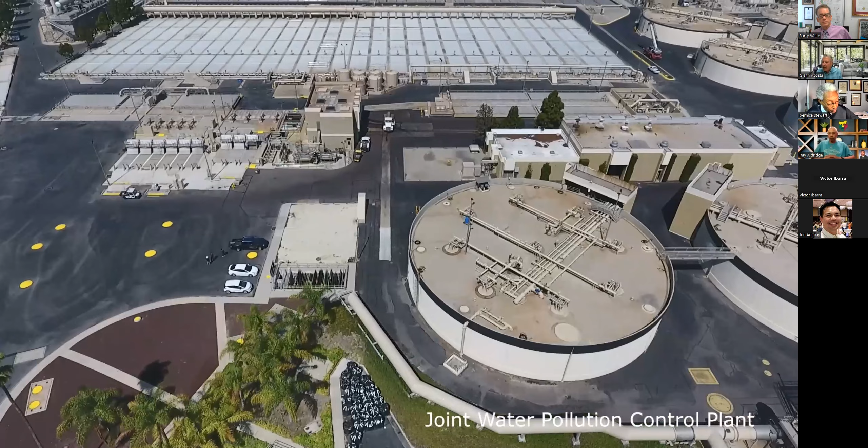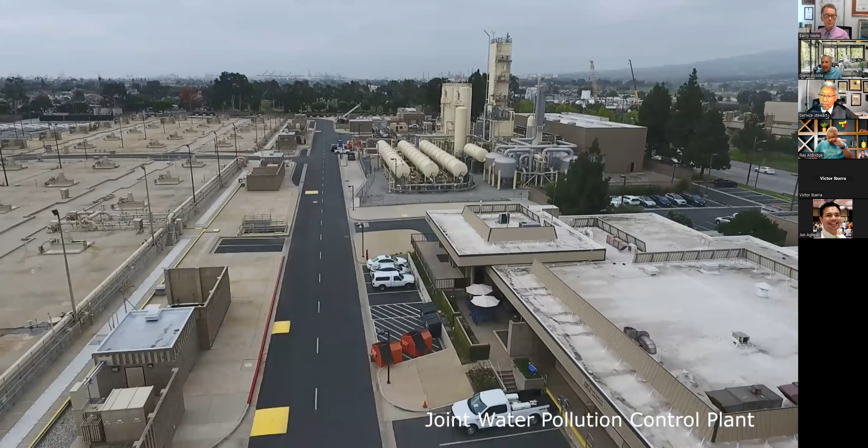As many of you know, we manage the sewage, or what we call wastewater, for over half the population in Los Angeles County. Our plant in Carson is the hub of the sewer system that serves the southern half of the county. Here you see a video clip of it. Whether you're living in Manhattan Beach, Carson, Monrovia, or Pasadena, you depend on this plant operating 24/7.

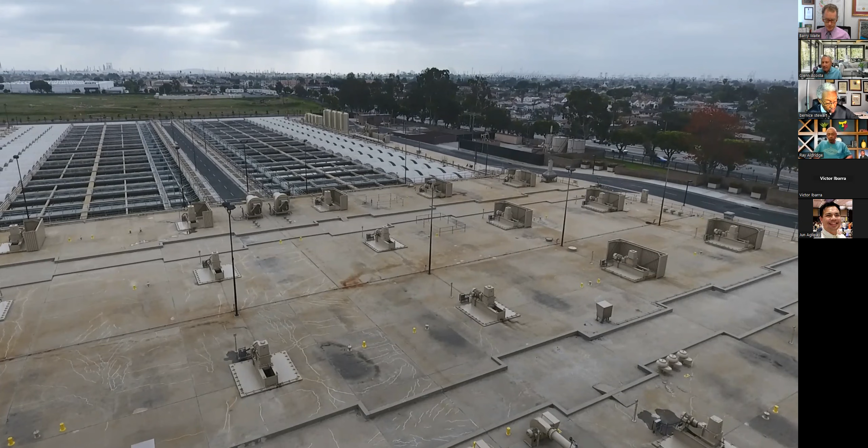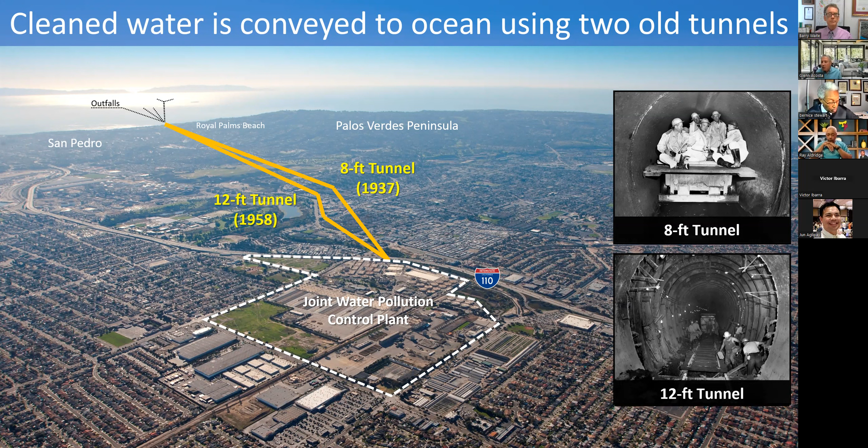So what happens is sewage comes into the plant, and in about half a day, that gets turned into clean water, and that clean water goes out to the ocean through 2 tunnels. Those tunnels were built 60 and 80 years ago. And so the Clearwater project is about addressing this aging infrastructure by building a brand new tunnel.

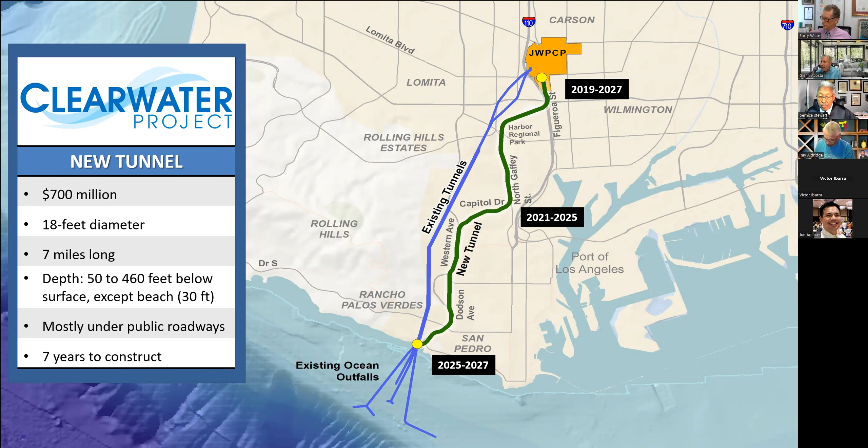So it's a 7-year project. We started in 2019, and the project won't be finished until 2027. The tunnel is about 7 miles long and 18 feet in diameter on the inside.

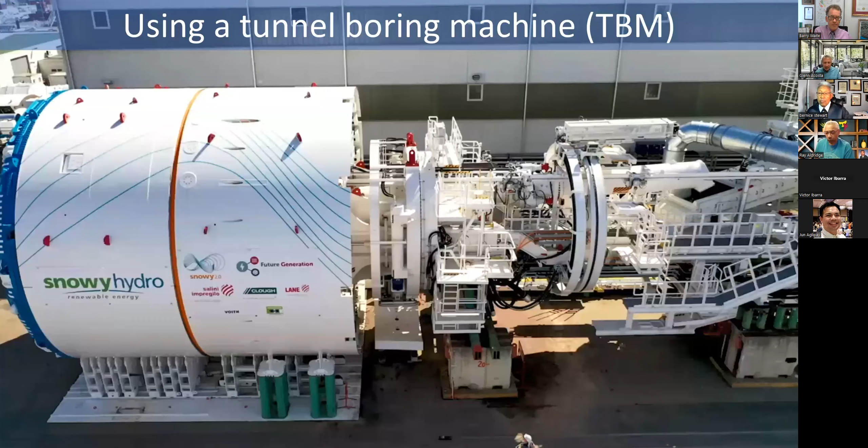So the front is what cuts away the rock and soil. The second section behind that is what puts up the walls for the tunnel. And then this long piece called a trailing gear is like a mini city that supports the front operation.

So here's how it works. The TBM, as we call it, cuts away the rock and soil for about 5 feet. It stops and starts putting up the walls of the tunnel. Once it builds a ring, it pushes off that ring and goes another 5 feet, and then starts putting up more walls. So essentially, it builds a tunnel as it digs.

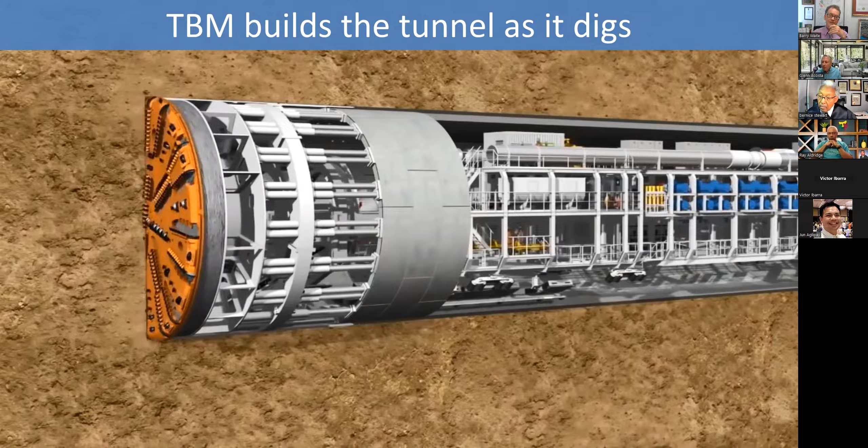So we needed to put this TBM into the ground so it can start tunneling. Right next to the 110 freeway on our property there, that's where we built a shaft so we can lower the TBM into the ground and start tunneling.

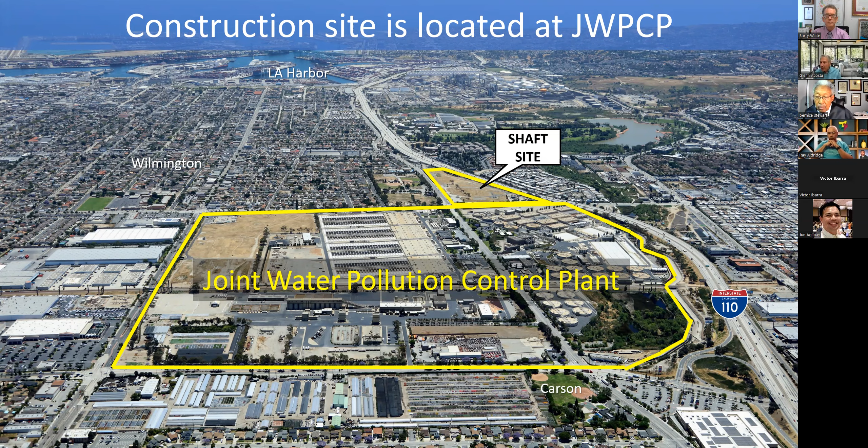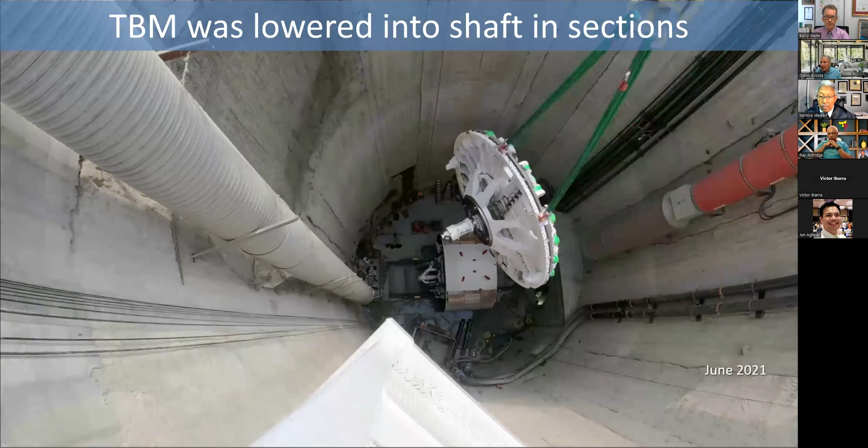So 2 summers ago, we took the TBM in sections and lowered it down the shaft. It's about 100 feet below the surface. At the bottom, the workers began to assemble the front piece, and then that's where it started pushing away and starting a 7-mile journey.

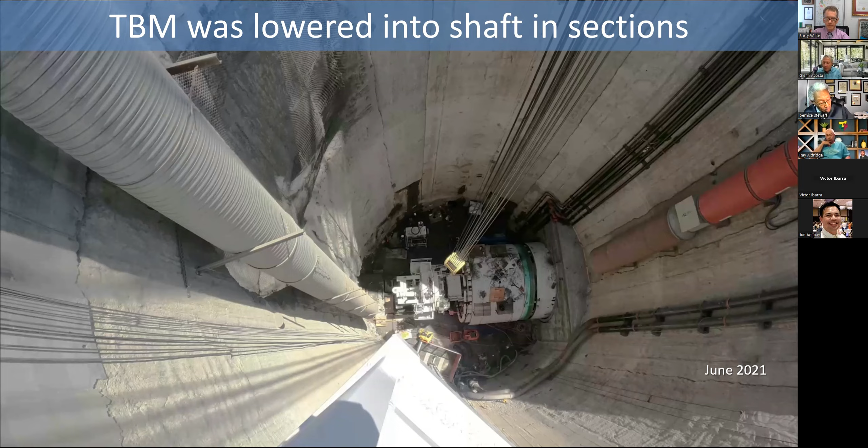So if you look at the shaft today, this is what it looks like. And here's kind of a view of the front part of the tunnel next to the shaft.

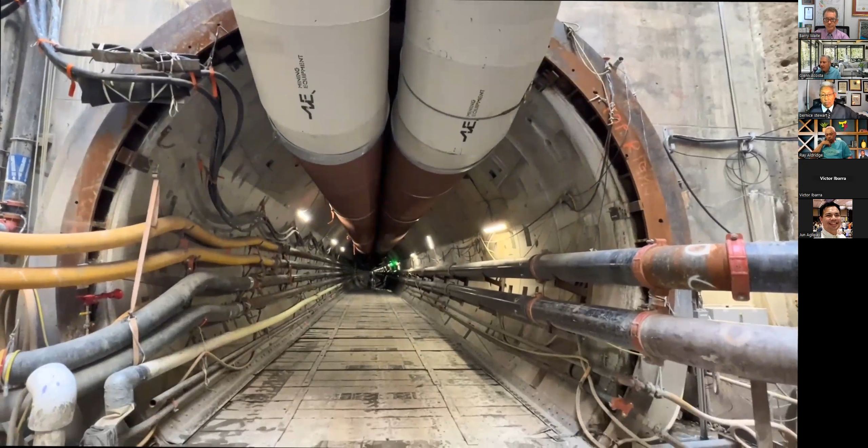So if you were to look at the alignment of the tunnel, it looks something like this. This yellow line is where the machine is going to go from Carson to the beach, Royal Palms Beach, 7 miles long. We started tunneling in November of 2021.

This past January, we hit the 2-mile mark. Right now, it's on Gaffey Street, right where the Home Depot is. So if you look at the area, that's where it's at. We hope to be at the target, the 3-mile mark, this summer in late July.

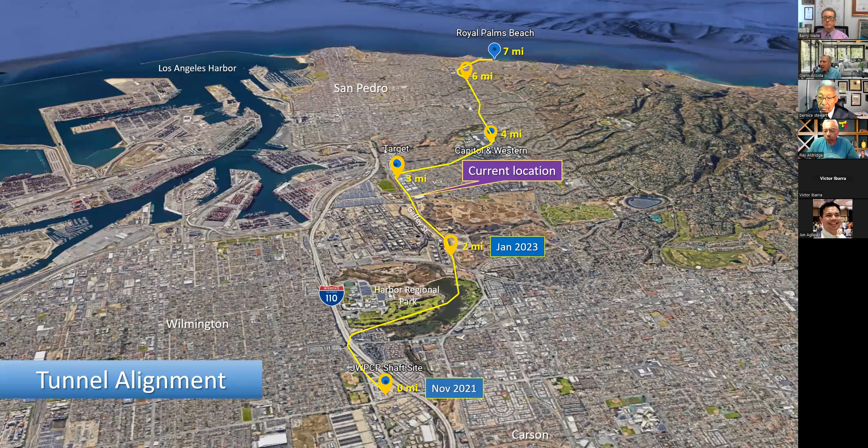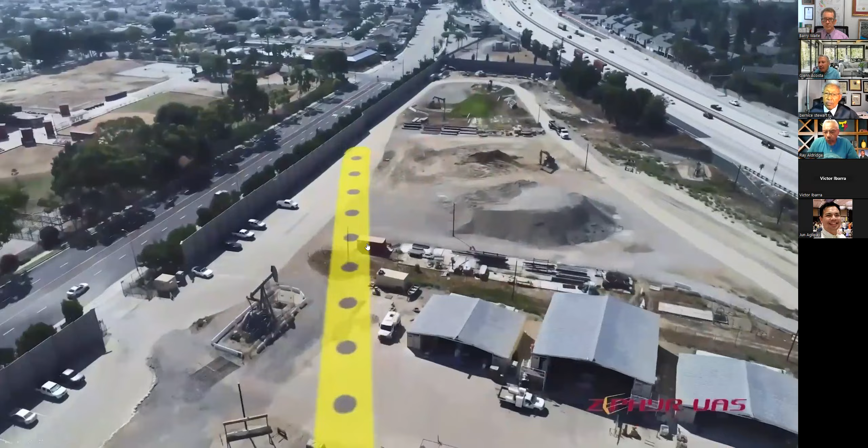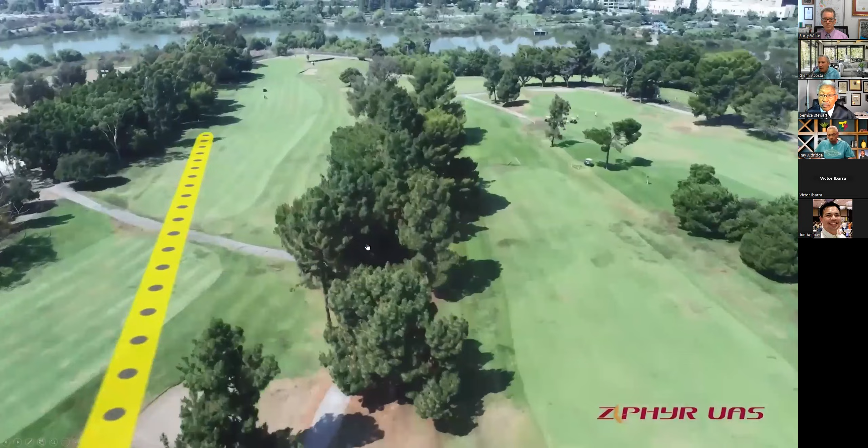So here's the path that the machine has taken. It left the property that we own down Figueroa, took a right turn underneath the 110 freeway, and then started going underneath Harbor Regional Park. On Machado Lake, it started making a turn towards Gaffey. It went up Gaffey and has gone past the refinery already.

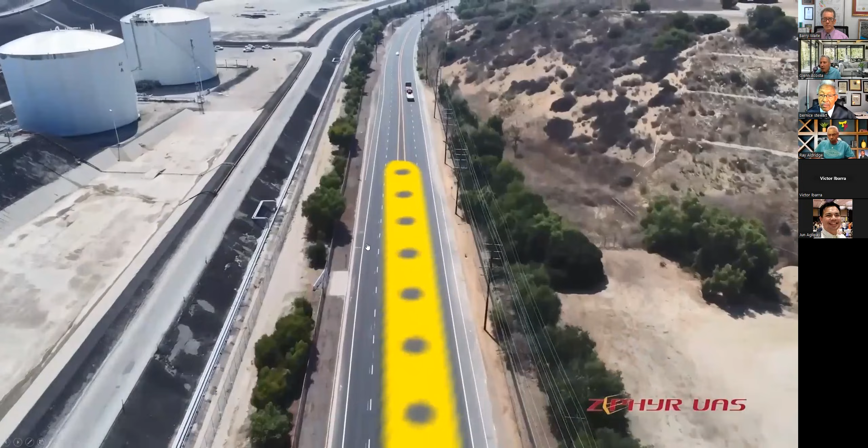And as I mentioned, it's basically where the Home Depot is today. So sometime in the summer, it'll start making the turn underneath the Target parking lot, and going up Capitol.

So how many feet does it go a day? It goes about 50 to 70 feet a day.

And here on the left, you see the first few feet of tunnel that was built right where the shaft is. And on the right is the first mile of tunnel.

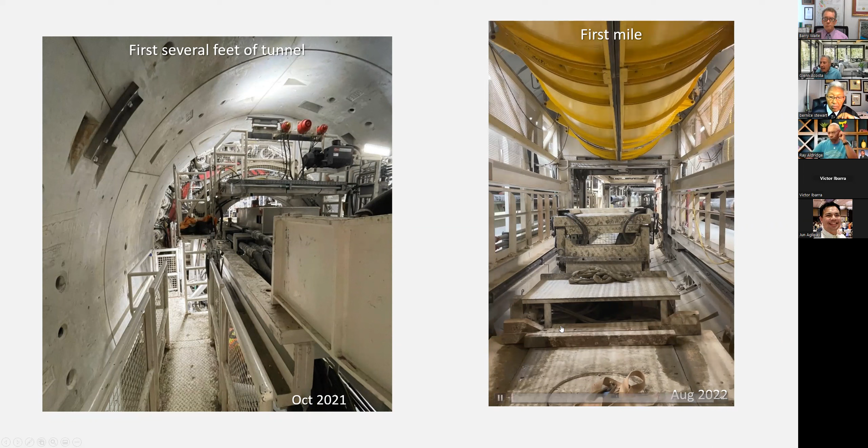So that machine I talked to you about, the tunnel boring machine, it's right here. And there's a vehicle that takes the wall segments back and forth every day. Here's the vehicle returning from where the machine is and going back to the shaft.

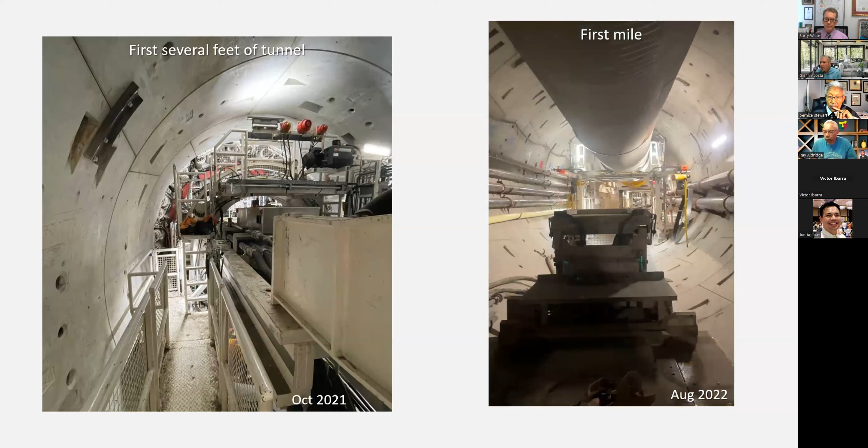So you can see that there are a lot of curves in here, which is different than Metro. If you go to the Metro jobs, it's basically a straight line. This is straight lines when we did MTA stuff, and no curves. But here is designed for curves.

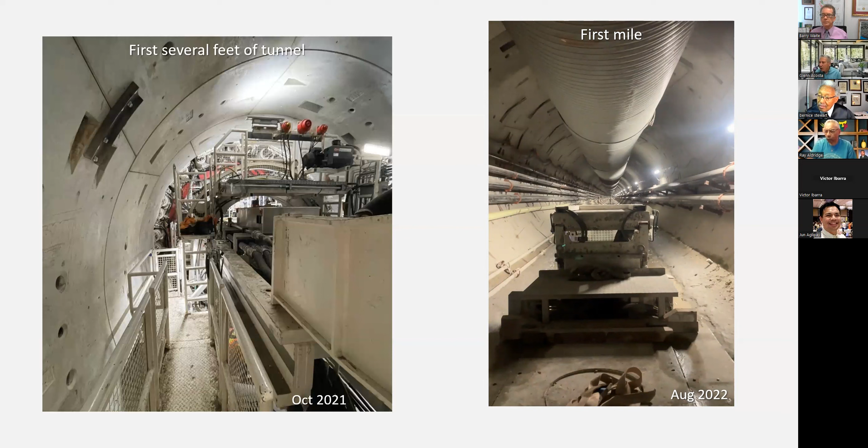And so we have 30 curves in the tunnel alignment from Carson to the beach.

What's on my mind is that the Pan Pacific, when we were going out Wilshire, we ran into some gas with MTA, and that was an issue. Okay, I'll mention that in a minute.

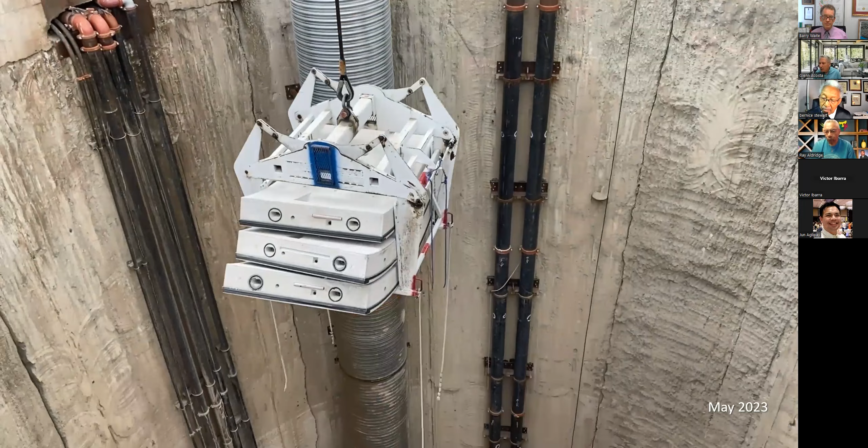So here is the wall segments being lowered down the shaft to the vehicle below. Once the vehicle is loaded, it goes out. It takes about 20 to 40 minutes to get from here to where the machine is, unloads the wall segments, and comes back.

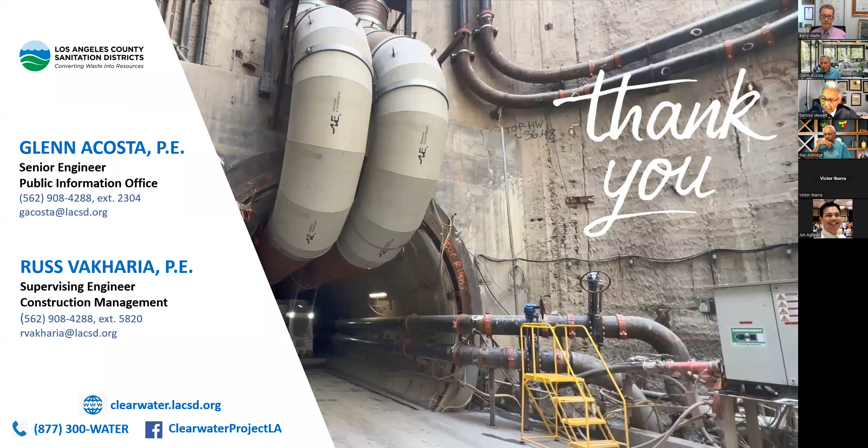And since all the personnel go down the shaft, when there's a change in shift, there's a people holder essentially that gets lowered and attached to the vehicle, and the workers hop on, they go to the machine, and then the vehicle comes back and removes that people mover from the vehicle. So here's the vehicle returning from the machine and coming back to where the shaft is.

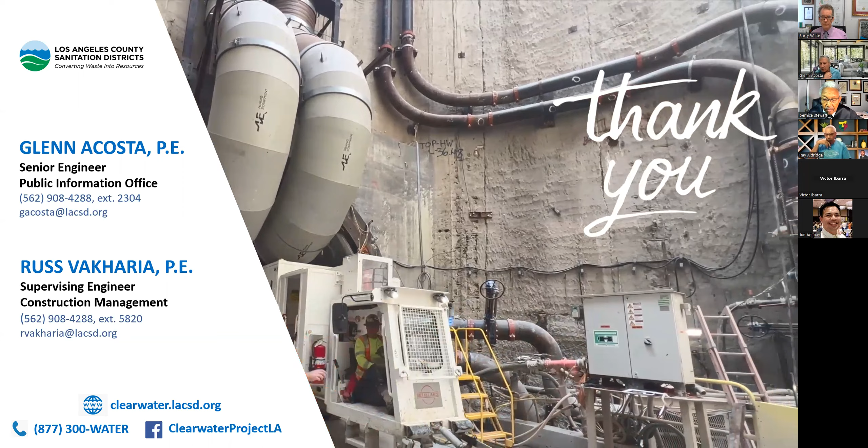So again, we've gone 2.5 miles. We'll be at the 3-mile mark this summer. And I put my information on here as well as the person that's overseeing the construction. So that's kind of where we are today.

So with that, I'll take questions.

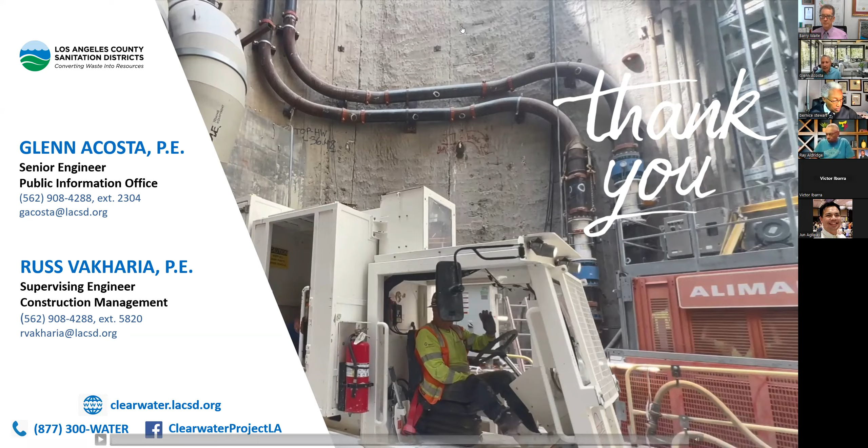Any questions? Well, that is fascinating. One question I had is, are you on schedule?

Yes, pretty much. We will be at the beach in either late 2024 or the beginning of 2025, and then we'll start the beach work to connect the new tunnel to the ocean outfalls. That'll take about 2 plus years to do.

How far are the outfalls out in the ocean, sir? So the outfalls that we have, we're keeping, and we have 4 of those. The 2 longest ones go out about 1.5 miles offshore and about 200 feet below the surface of the water.

So it's pretty deep. I have a couple of questions, if I may. Go ahead, Ray. One was, you were saying that they did the staging area right there at your facility, where they dug the hole to lower everything down, the shaft. Is that a different project? Because you guys are located below or south of Sepulveda, but there was digging going north of that, almost to 223rd or so.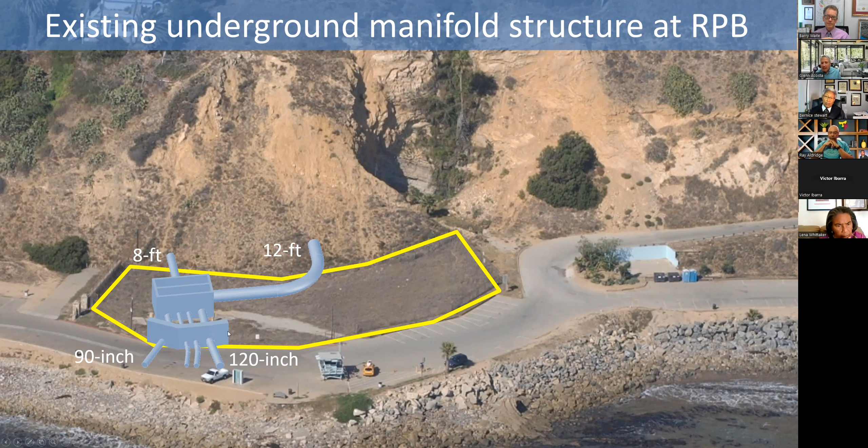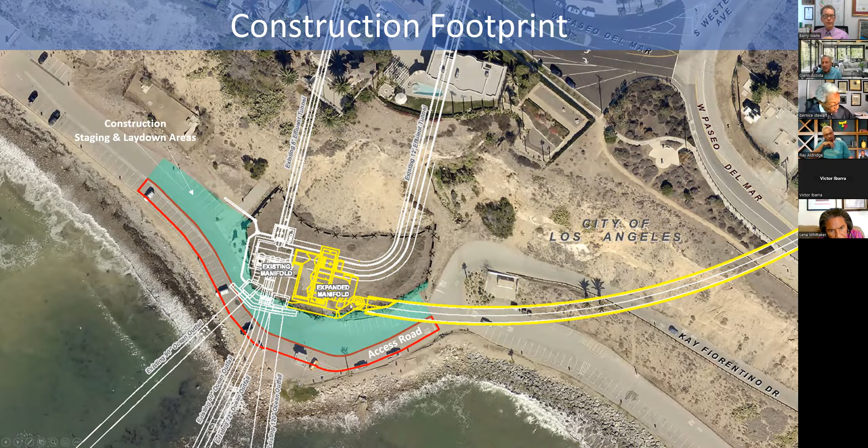So when the new tunnel comes in, which is coming from this direction underneath the preserve, we have to build and modify the structure that's underground so that we can connect the new tunnel to the ocean outfalls. That work will take about 2 years, maybe more. We have an area that we need to lay down equipment, and trucks coming in to bring in the supplies and so forth. This is kind of a rough illustration of what it's going to look like.

It will probably change between now and then, depending on the needs of the trucks being able to turn around, that kind of thing, but this is kind of what it's going to look like. We're going to have a small shaft so that we can have access to the underground structure, and we can remove the tunnel boring machine from this location. This work will go on during the week, during normal business hours, no work in the evenings, no work on weekends. Our goal is to keep the beach accessible to the public at all times. That's what's going to happen soon, in a couple of years.

Just related to that, you can see right there that there's been some land movement. How big an issue is the whole lack of stability to this part of the project?

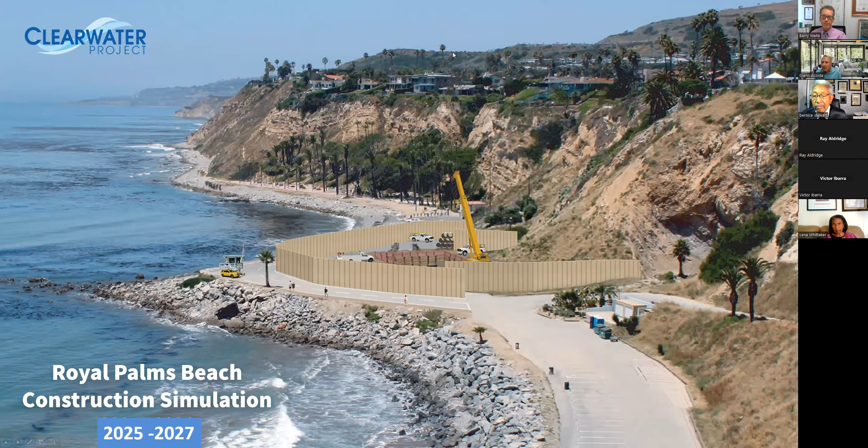Since the tunnels were installed, we have not been able to take them out of service because there's always flow going through them. It's like running your car without taking it in for maintenance - at some point you got to do something. So the only way to address this infrastructure is to build a brand new tunnel.

So you're not going to do any maintenance on the old one once you get the new one in? The plan is to put the new one in service, then inspect the old tunnels, see what kind of rehab work it's going to take, how much it's going to cost, present that to the board, and let them make a decision on whether it's worth spending the money and having redundancy in this critical part of the system. Okay, the key point for me is redundancy.

I mean, you're going to develop it, but we have that infrastructure. All you need to do is change the tires and maybe change some spark plugs and some pistons, and you're ready to go. Do you understand what I'm saying? Yes, but let's get this through, then you can come back for the other piece.

Any further questions for any of the participants in this meeting? Because I want to hear from our president and CEO of our chamber to tell us about the economic initiatives that the chamber is planning.